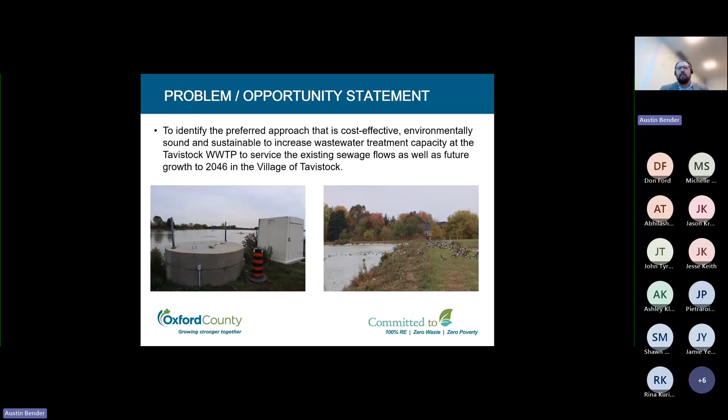We have municipal elected and local agencies, Indigenous groups, utilities, as well as residents and the general public, which is kind of what we're doing here tonight. So with that bit of background, we're going to move into the actual problem and opportunity statement. The purpose of this project is to identify the preferred approach that's cost-effective, environmentally sound, and sustainable to increase wastewater treatment capacity at the Tavistock Wastewater Treatment Plant to service the existing sewage flows, as well as future growth to 2046 in the Village of Tavistock.

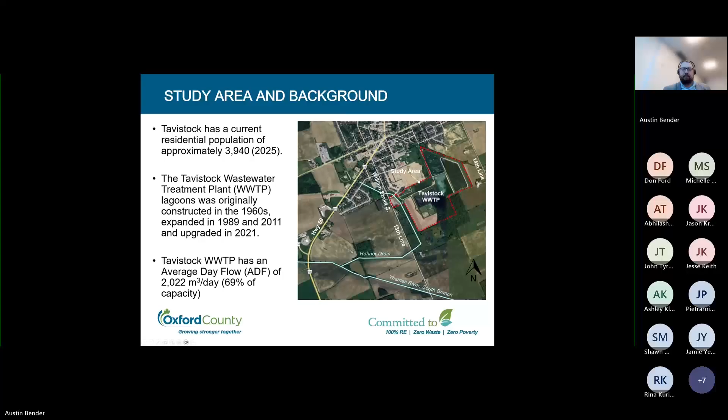The plant currently receives an average daily flow, or ADF, of just over 2,000 cubic meters per day, and that's about 70% of the capacity right now. We zoom in a little bit on the plant and how it actually works. Though it is a lagoon-based treatment plant, it is different than some other lagoon systems you may have come across at other municipalities. Sometimes lagoons are simply a vessel for holding wastewater. The wastewater is allowed to sit for a while and then discharged periodically.

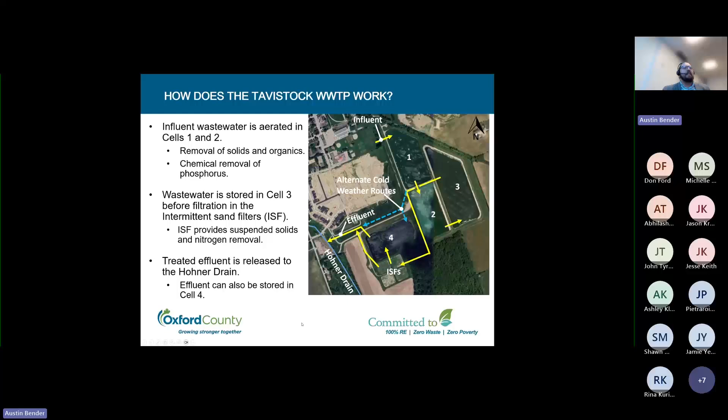The final process here is the outfall, which is shown here. It enters the Hohner drain. The Hohner drain runs south and a little bit west in this picture here, and intersects with the Thames River. So along that same line of where does the effluent go? As I mentioned, effluent is discharged eventually to the Thames River after passing through the Hohner drain.

You also want to note that these limits change in different parts of the year, offering some slightly higher limits in the cold weather periods, and then more stringent limits in the warm weather periods. Following a review of the effluent data for the past number of years, the treatment plant consistently produces high quality effluent that does meet the ECA limits.

So if we start to look ahead to the future, the residential population of Tavistock is estimated to grow by about 1,500 people by the year 2046. That will drive, along with it, commercial, industrial, institutional growth. So all of that together means essentially more wastewater. RVA completed growth projections to estimate the resulting future wastewater flows. And it's estimated that influent flows will reach around 3,905 cubic meters per day by the year 2046. That represents about 33% more flow than the treatment plant's current capacity.

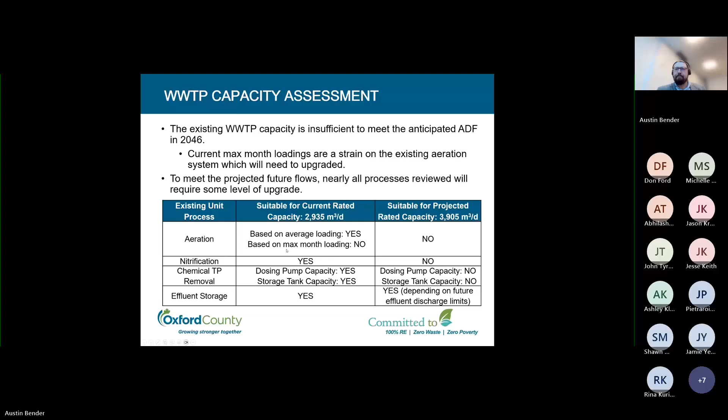I'm going to talk a little bit here about the field investigations that have been completed so far and what are undergoing at this moment. We're completing these field investigations to review the natural, cultural, social, and economic resources in the study area so that the impacts can be minimized. We've completed to date the Thames River assimilative capacity study. And again, we'll discuss that in a couple of slides in more detail.

We've completed a species at risk study for the project area along the Hohner Drain and Thames here. A stage 1 archaeological study as well as a cultural heritage study are currently ongoing. The archaeological study should be wrapping up in the near future. And finally, we also completed a hydraulic capacity assessment of the Hohner Drain itself.

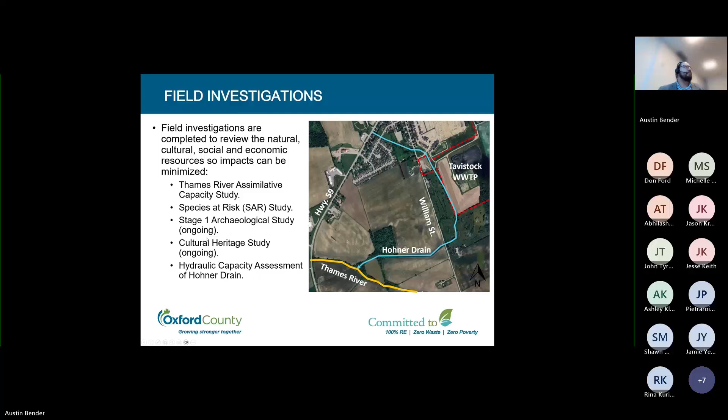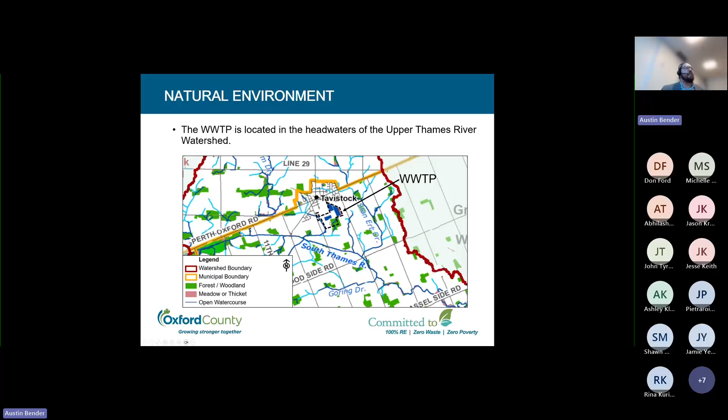In terms of the actual treatment plant location, you can see the study area here, the dotted line. The one piece to note here is there is a section of a forest in the lower corner of the treatment plant. So RVA's terrestrial ecology team came up to site a few times. We conducted a breeding bird study two times a year, I believe spring and summer, as well as a terrestrial assessment. The lagoons themselves support a variety of migratory shorebirds, semi-palmated sandpiper, plover.

I know that when I've been on site, I've seen lots of ducks and geese and herons making use of the lagoons. As I mentioned, there's also a mature forest and swamp. A portion of that is actually located within the plant's property boundary, and they host a diverse section of plants and wildlife.

Through our study, we determined the locations of two species at risk, according to the Endangered Species Act. One of them is the eastern wood pewee, which is a small bird, and that was noted by some of our birding staff within this mature forest here. The other one was the location of a couple of butternut trees, which were growing in one of the fence rows.

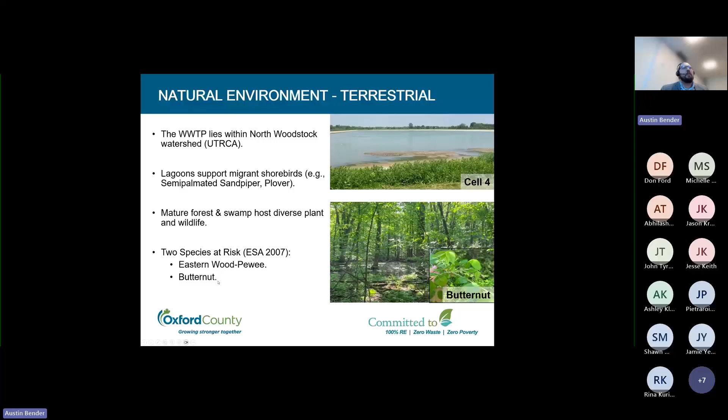Our review found the potential presence of the northern sunfish, which is a species of special concern. And we were able to confirm that fathead minnow, creek chub, blacknose dace, and brook stickleback are found in this creek. The last thing to note about the aquatic environment is that there was some iron staining noted within the drain, and that suggests there's some sort of groundwater input into this particular drain.

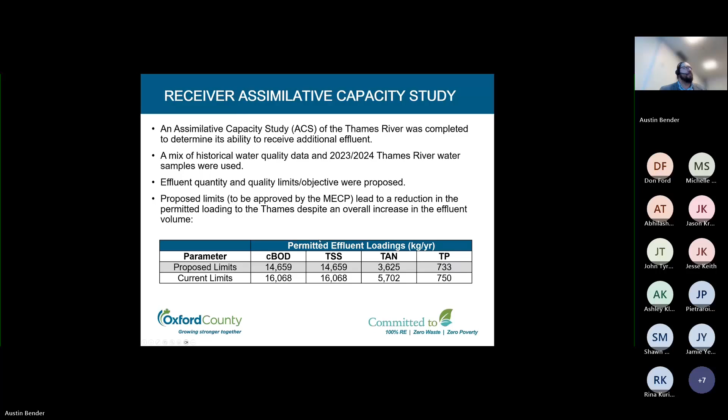The proposed discharge limits, again, are yet to be confirmed by the MECP. We iterated that a bunch of times to make sure we're meeting the receiver water quality. So when we're putting effluent into the Thames, we're making sure that we're still meeting the water quality objectives for that mixed water. We also are trying to reduce the storage requirements here.

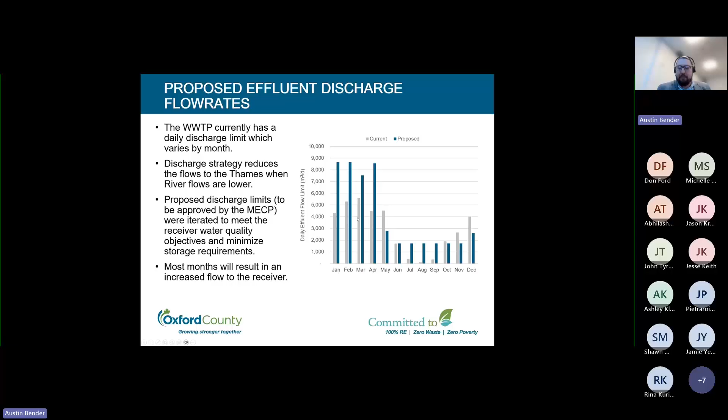Alternative 3 is reducing wastewater flows through water efficiency and extraneous flows. That can be preventing things like stormwater getting into your sewer system, because we don't want to be treating what is essentially clean water. Alternative 3 can't provide enough additional capacity to support the additional growth. However, it will be implemented by the county as part of any servicing solution.

Alternative number 4 is upgrading the plant to what's known as a partial mechanical system on the existing site. And number 5 is decommissioning the existing lagoon-based system to some extent and constructing a mechanical plant on the existing site. Both alternatives 4 and 5 are deemed to be feasible solutions, so they are going to be reviewed and evaluated in detail in the next couple of slides.

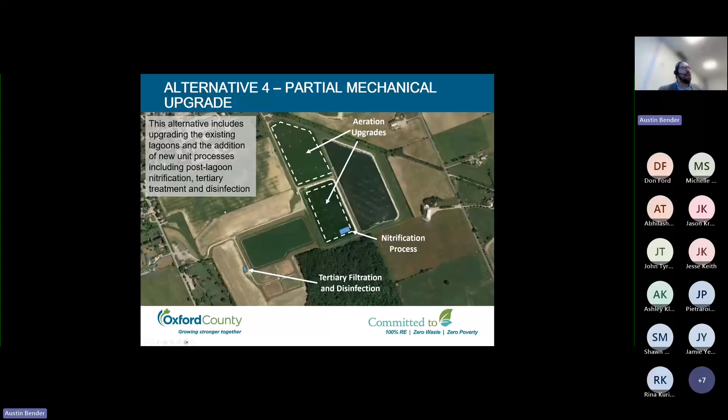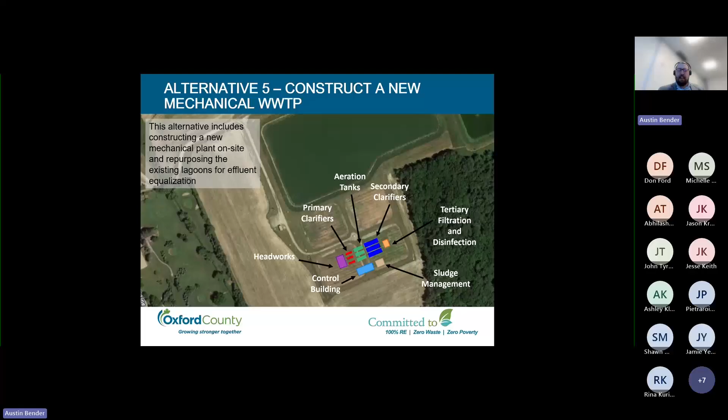Of notable difference here, because a mechanical plant has a lot more going on with it, there would be a control building for staff, as well as some sort of sludge management process on site. Those are the two alternatives at a high level. We'll move into how they're actually evaluated.

And then for each one of the alternatives, we went through and scored each one of these sub-criteria. And then the product of the score times the weighting, you sum that up, and then we can determine the preferred alternative. So just at a high level, go over a couple of these options. Things that were considered were constructability and construction impacts. We need to be able to treat wastewater while we're completing construction. So seeing how that would work ties into the second one of phasing.

The compatibility or optimization of the existing infrastructure that's on site. The operation and maintenance level requirements. They're different for these two plants. A partial mechanical facility has a lower operational maintenance requirement than a mechanical plant would. And then technical abilities: the ability to meet the flows required, the anticipated discharge limits, as well as resiliency and adaptability as things change in the future.

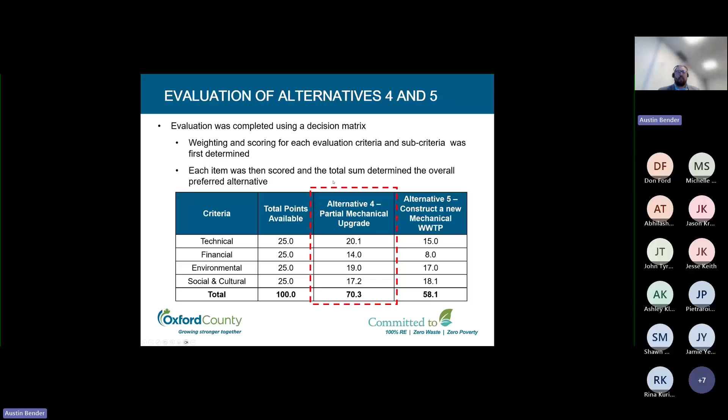So when we put that all together and complete the weighting, you can see this is a condensed breakdown. Out of a total 100 points, once we complete the weighting and the scoring, the overall sum determined that alternative 4 had the highest score and is therefore the most preferred, which brings us to our preferred option, alternative number 4. A partial mechanical upgrade has been deemed to be the most cost-effective, environmentally sound, and sustainable approach to servicing the Tavistock community and meeting the wastewater servicing needs out to 2046.

So next steps. We are going to continue some of our ongoing field investigations. We are going to be meeting with MECP to review and confirm the effluent requirements for the expanding wastewater treatment plant. This is a critical piece because it will be very important when we start to undertake phase 3, which is actually developing alternative design concepts.

And so phase 3, we will take that alternative number 4 and break it down into design options, and then follow through with another evaluation process. And then we'll meet back here again for PIC number 2, where we will show the alternatives, the concepts, and the preliminary preferred design. So once that's completed, we'll confirm the preferred design concept.

We'll move to phase 4, producing that environmental study report, the ESR, and then that will be submitted again for public review. And following that 30-day review period, we'll finalize the Class EA.